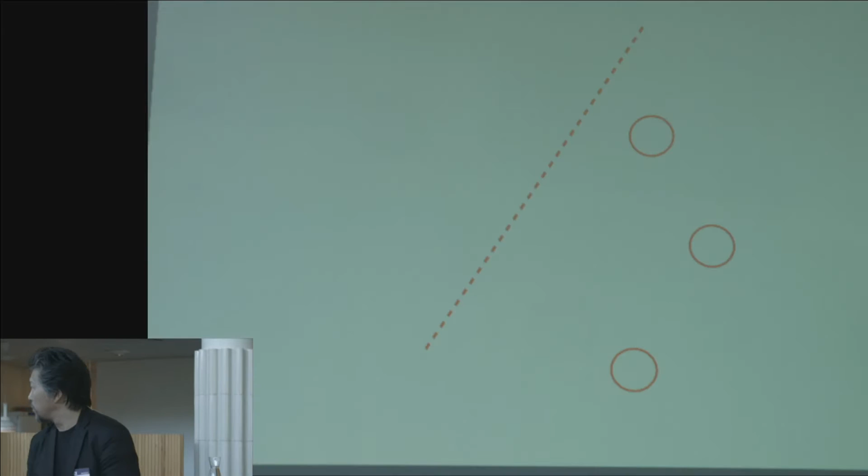What happens here? The most population is gathered in the southeast coast part of China. So we say it's a very, very big country - equivalent to what the USA has, but actually the USA has 5 times more agricultural field than China. Then we have 5 times more population than the States, which means the United States has 25 times the resources they have. So this is a situation brought by this guy, and he's saying he's 70% right, 30% wrong, and I think it's probably reversed this time.

In 1979, he set up an open policy for China, to open this window to the world, or open the door, actually. So Shenzhen suddenly became a rival city to Hong Kong, becoming a special economic zone. So the population suddenly grew 500 times during 35 years. So this is the basic situation.

You see what was there, then what is now - the PRD, we call it the Pearl River Delta area. This is getting very massive development, and the city is actually growing from the east towards the west, and it's totally developed almost - we don't have land here. You see this caused a huge wave of urbanization movement happening in China, probably the largest in human history, and Shenzhen is probably also the central point of it.

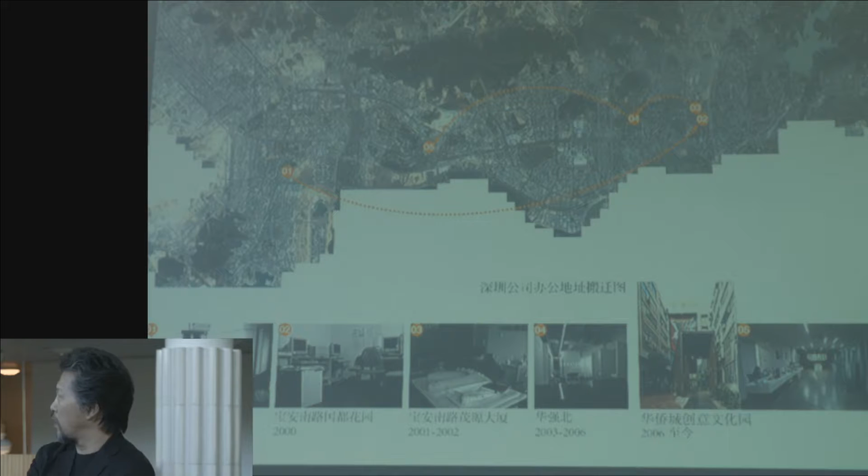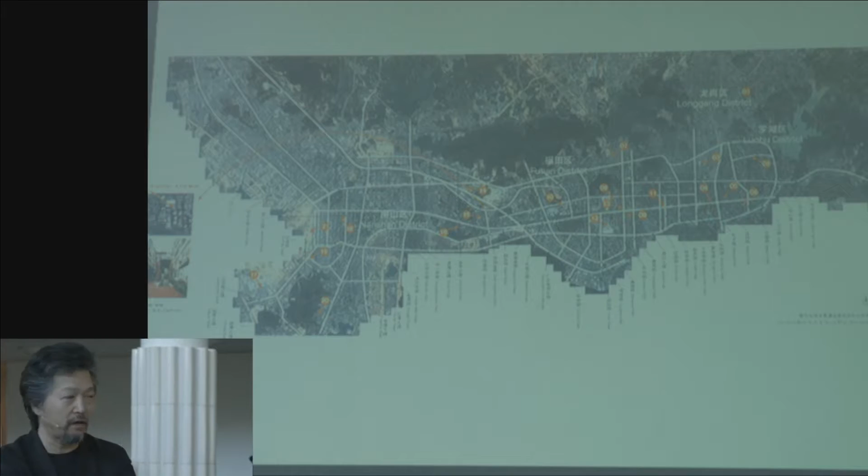And our office actually followed this kind of move from east to west, and our projects were built all over the place. We put it like 20 some, but actually we have over 100 projects built during our 16 years of practice.

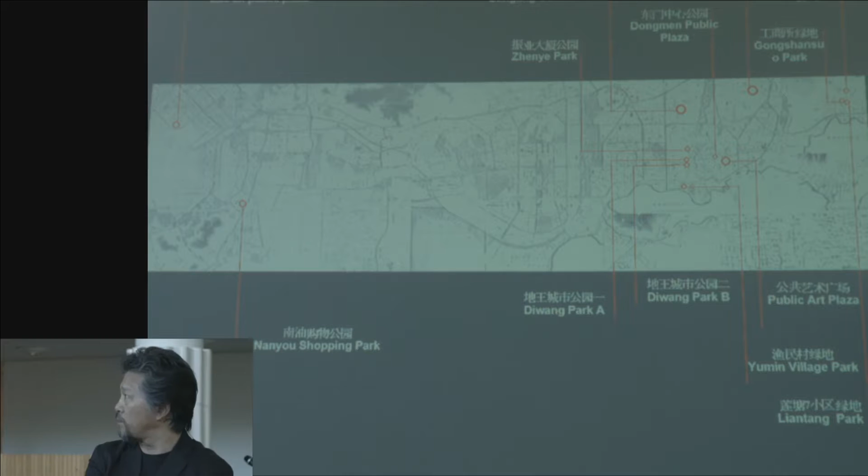We started practicing in the year 2000. Around that time, it already had 9 million people, so we were dealing with a big city problem, trying to bring in different cultures and deeper layers, adding something to the urban situation. There's really a lack of something behind it, we don't have too much, so we're trying our best to catch up. We designed and built urban public spaces in different places, and actually tried to practice what we're supposed to do next, as the city gets its main structure and is mostly already framed.

So there are several projects we've done during the last 10 to 15 years, some office buildings. As a professional architectural firm, we care about architecture, we care about buildings, lots of things. We do new buildings, we do renovations like this, we do some creative industry, creative parks like this.

Our office was the first office to move to this area, in the center of Shenzhen. It used to be a very shady light industry area, almost abandoned. Then we turned it into a very fancy cultural landmark in Shenzhen.

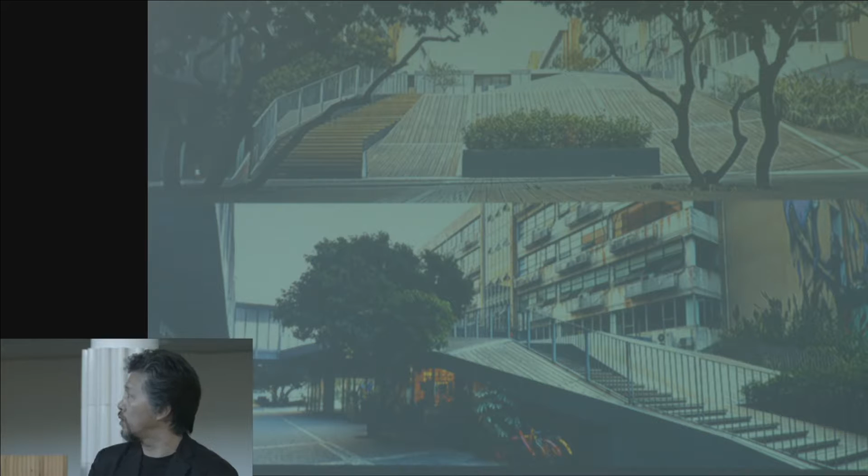We've done all the paintings, it's all our work. We organized internationally famous painters to come over and paint those things, making this very special. This is all our work in the public area.

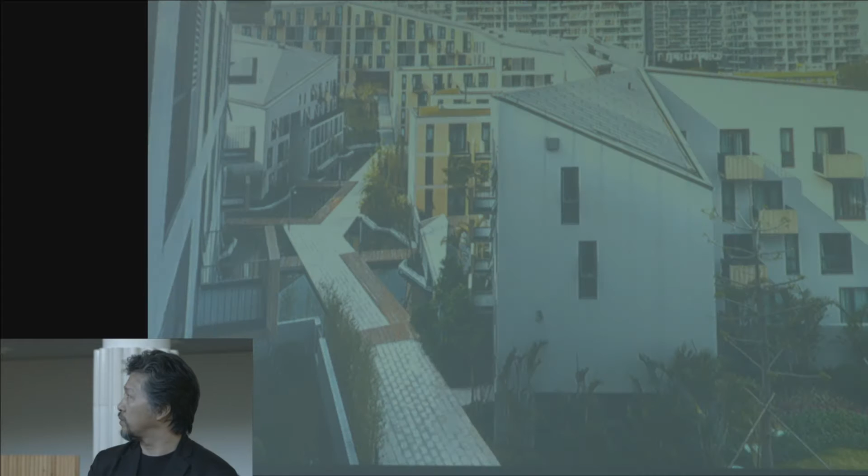We did some probably well-known projects at that time, in 2008, something was built. And we're talking about some environmental crisis — once Shenzhen got to 13 million people, and the whole China has the same problem, Shenzhen has less pollution, better than Beijing, better than Shanghai.

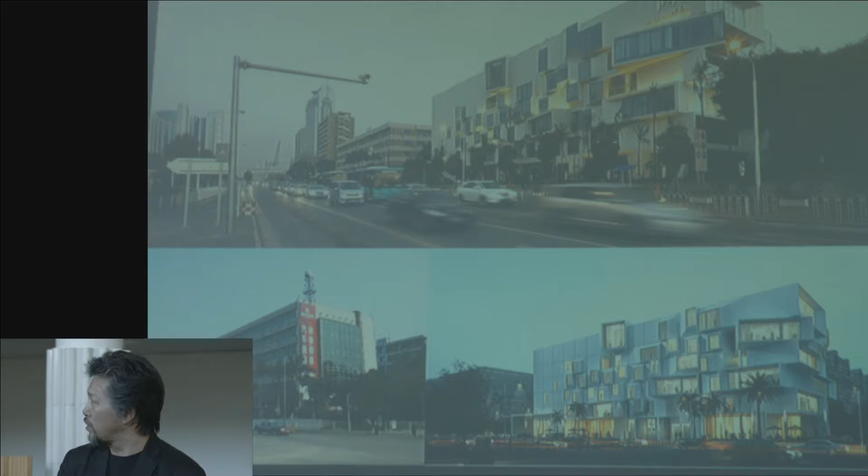We still continue doing a lot of public buildings. Even this one, which is so small, less than 1,000 square meters, we built within 2 years, and we continue doing some fancy renovation.

This is an experiment and also the proof of what we try to show people — the value of the old building. So we don't easily just tear it down; we leave some history, leave a memory for the city, even though it only has 35 years of history. The old buildings, we only have 10 years of memory.

Memory keeps getting wiped out. It's like we're just a hard drive, and sometimes we always get reset. This isn't right, so we openly criticize this kind of situation.

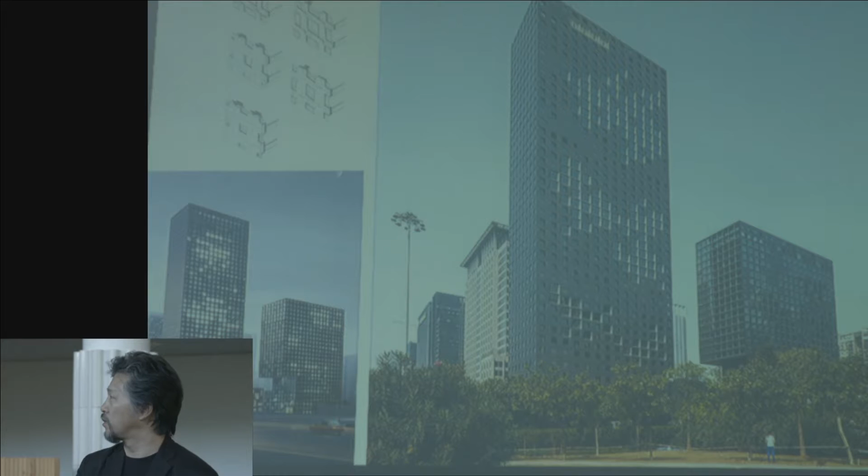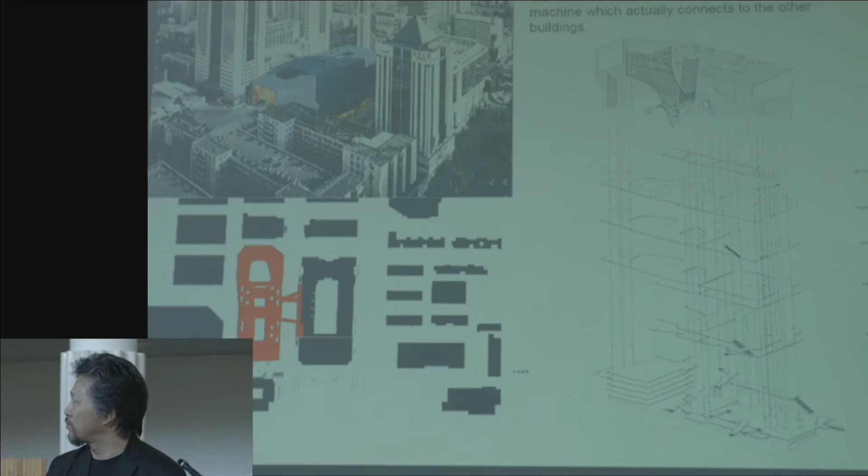We have done a lot of high-rise buildings. This one is going to stand for probably at least 50 years. Some building complexes we tend to do — this is something we really like to do, trying to use the new building to solve existing problems.

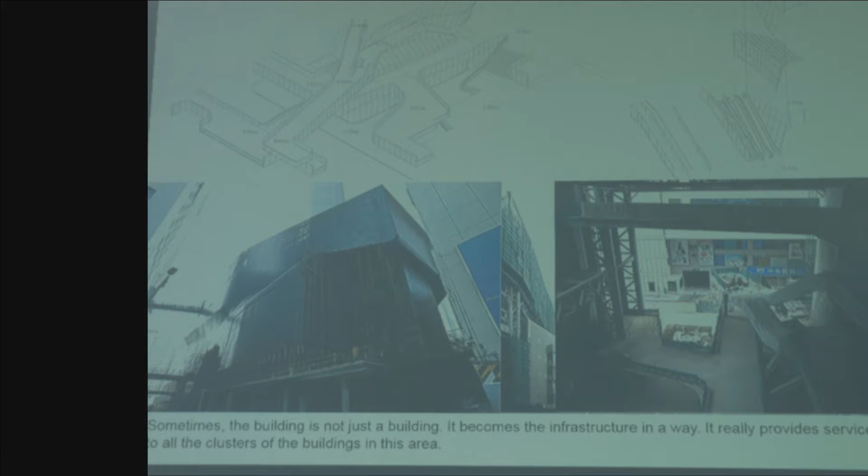Some human logistical circulation issues, and in a very congested area, we build usable space and also solve some existing problems.

I don't want to talk too much because of time, but there's a very interesting project — even though it's so simple, it actually combines a print factory, office building, and art gallery all together on one triangular site, a very congested site.

The circulation there was very hard to design, but it's already complete. Sorry, I didn't replace this photo.

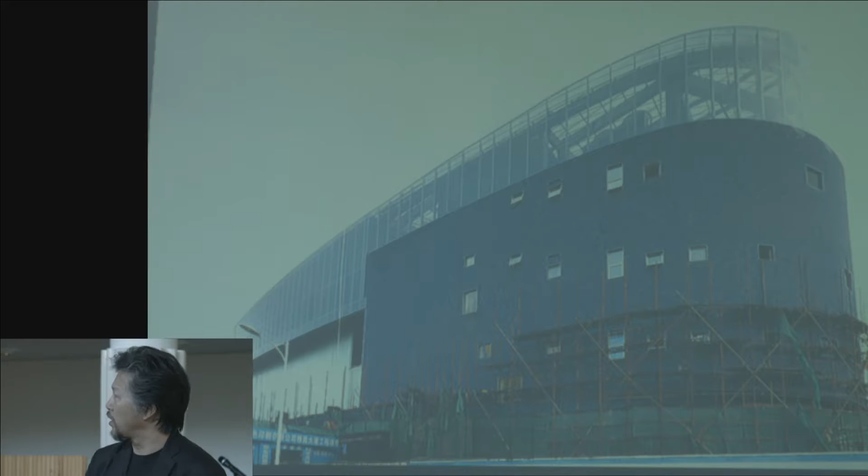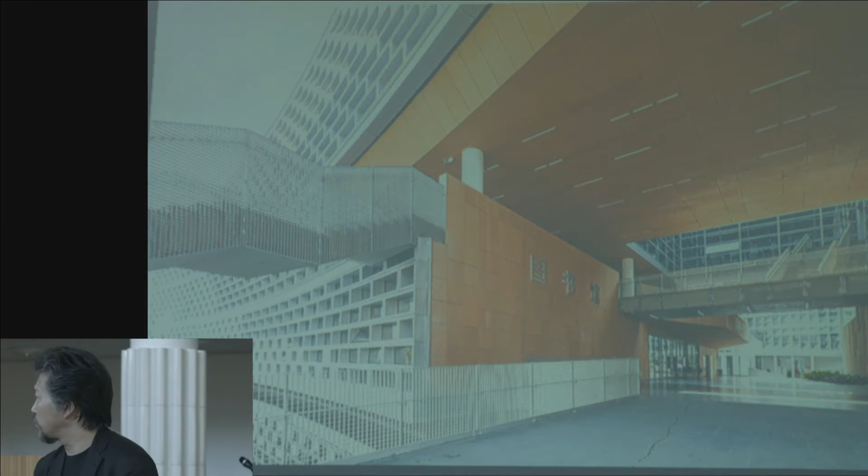This is a library, a university library, and we tried to use some new approaches. This gets to the point where the whole of Shenzhen has run out of land, so we have no choice — we have to do urban regeneration.

This has become a major issue, and you see that Shenzhen has urban villages. It just happened that it used to be a rural area, so the villages are scattered around within about a 30 minute walking distance.

This is kind of evenly distributed — some villages are large, some are small, but they're nicely distributed. It became the low-income society in Shenzhen, because when Shenzhen acquired all the farmland, the city just kept growing and surrounded these villages.

Those villages weren't part of the urban city system — they were self-controlled and self-managed in everything. The city only provided power and the sewer system, that's all. So this became a very interesting situation.

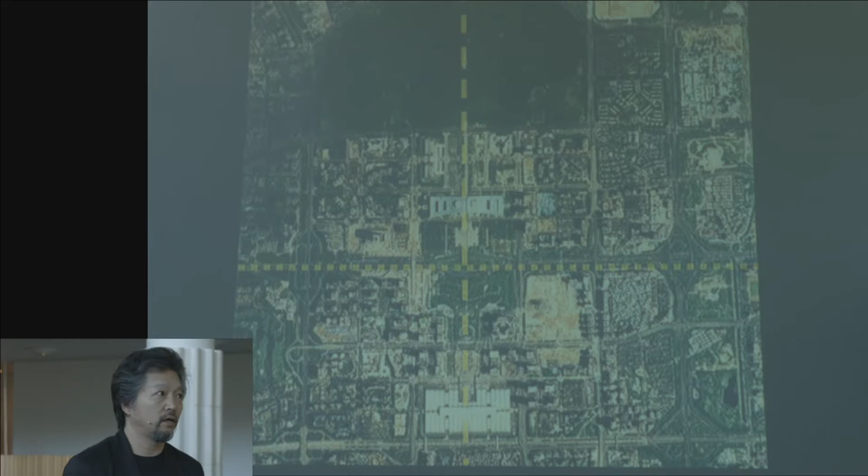When you see Shenzhen develop, like the CBD, that's just happened in the last 15 years. It grew from just empty land suddenly into a very rich district. A lot of life, both the old type of life and a new type of economic pattern, is being introduced.

This gave us another opportunity to think about what we should do. Do we really want to keep the traditional role as just a professional architectural firm, doing whatever the client wants, sitting and waiting for clients to come give us a job? We started a second line doing research. So we borrowed this idea of research-led design.

The way we thought we could do better was to study what's going to happen in the future of Shenzhen, a city like Shenzhen, maybe some other cities. Our starting point was research on urban villages and the conditions of how people are living there. We found it so interesting that most people don't really understand or know about it.

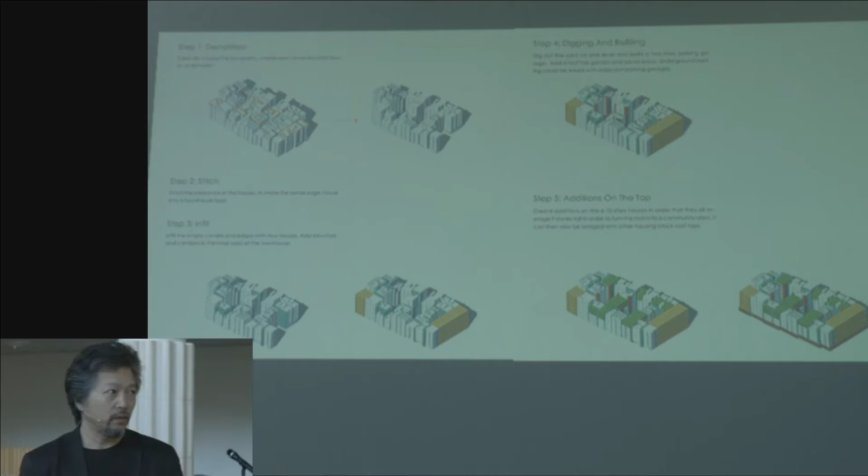This is what we have done. I don't want to over-explain it, but it's about how we can use the existing cluster—take off some of the buildings, improve the ventilation and sunlight, split those buildings into pieces, and put them on the roof.

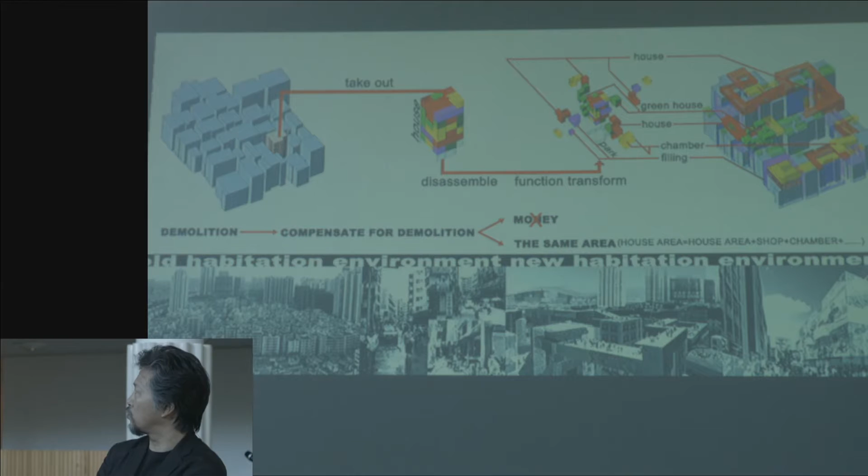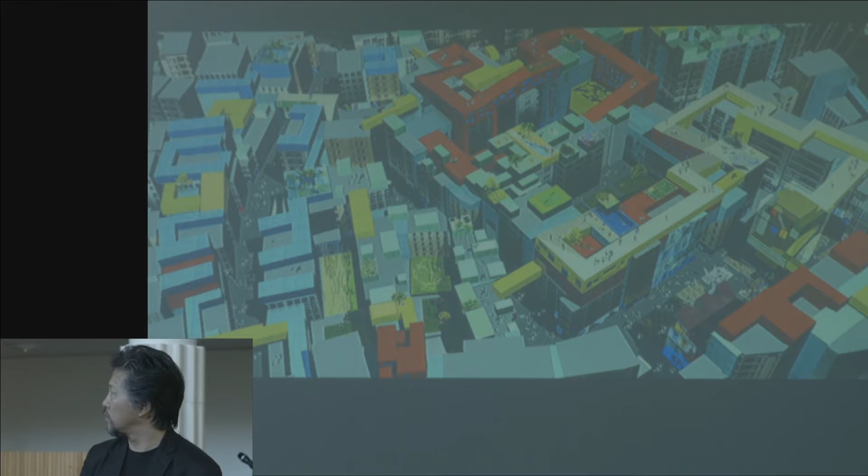In return, we solved a kind of fire escape route—a new route on the rooftop—and created a whole new level for the residents, for the tenants actually, to live their own lives, leaving the ground level as a totally commercial area. So we call this rooftop urbanism.

We drew this specifically to convince people that this is actually nice, right? Urban villages aren't that scary—we can improve them with this kind of method. It doesn't necessarily have to be like this, but that's the way we should do it.

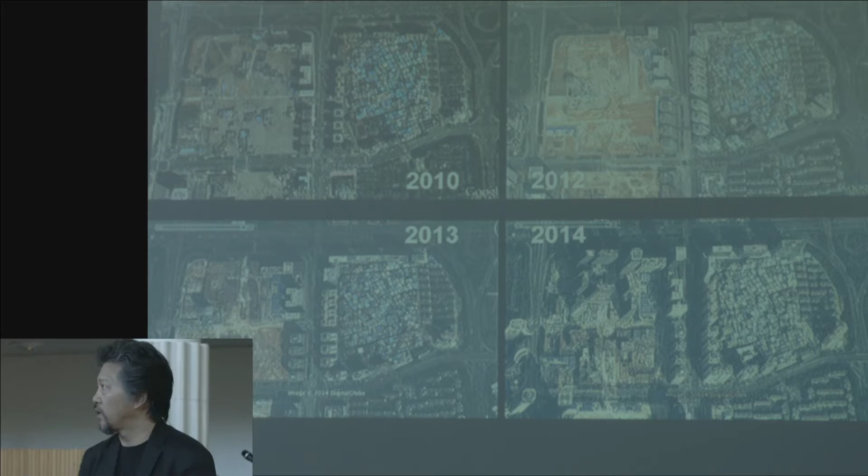We published a book, handed it to the city, handed it to the media. We worked with people who had similar ideas, and we pushed this. I think it had a little bit of an effect—the city actually started to identify which areas could remain and which could be demolished. So this is what happened.

Actually, what happens is also the fate—but people cannot control their fate, right? So when the left side is demolished, the area is already evacuated. But it used to be so crowded, so rich, and the people had their life there. Even though it's a kind of low-level life, they were still living happily.

Well, I see everybody—most people are kind of happy. So we cannot just chase them outside of the city to the suburbs. They would spend a couple hours commuting into the city, creating a huge traffic problem and increasing the cost of the whole city. So this is not going to happen.

We already say you cannot just demolish those urban villages to replace them with ugly residential towers. You can see it everywhere in China, not just in Shenzhen.

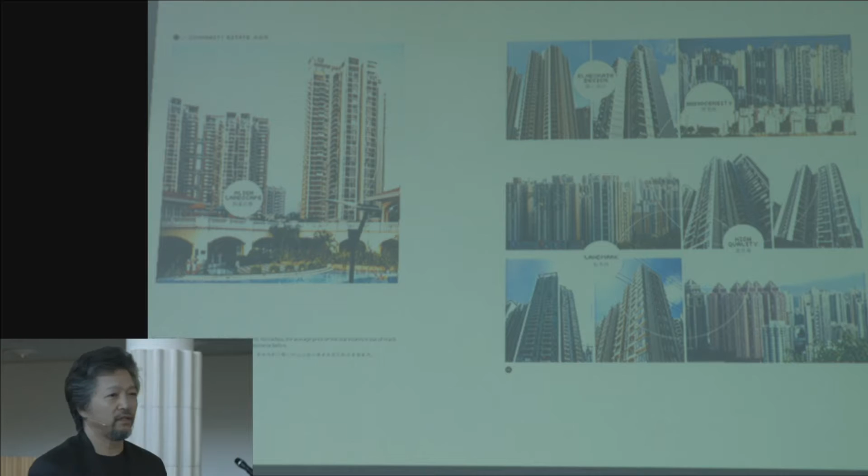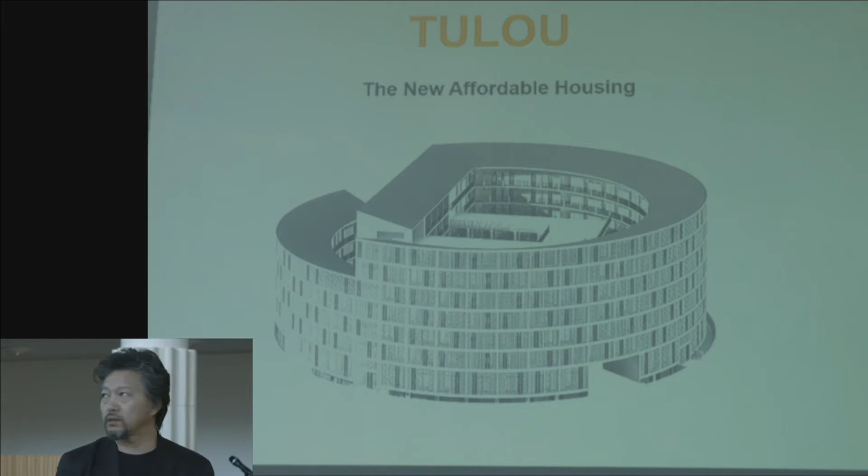This is the experience we did with a developer who wanted to do a social housing experiment. We created this new affordable housing program inspired by the traditional Tulou—a vernacular architecture that appeared in the last 500 years in the southeast part of China. In the mountains, there are still thousands of them remaining right now.

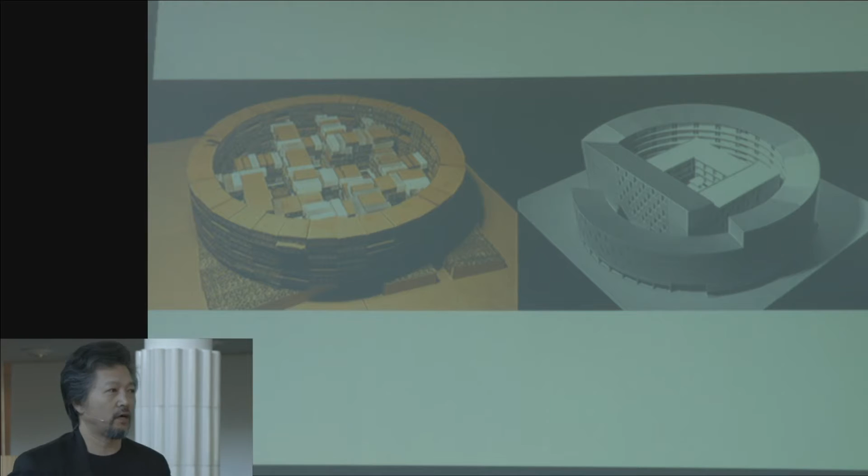And some of them have become like this—probably one of the best UNESCO World Heritage sites. Our first idea was to combine the urban village idea with this Tulou formation, and put them together to make a very big, very large affordable housing community.

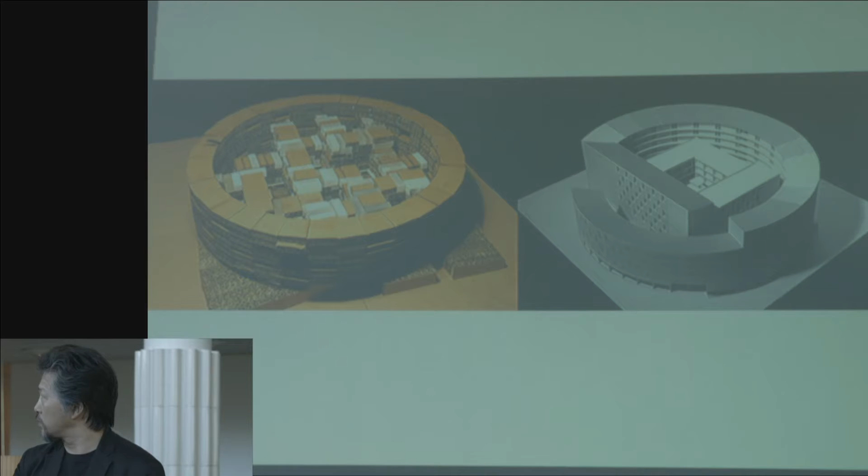Later we selected the right site—a smaller building—and we tried to use it as a prototype that we could copy, colonizing it to the whole city.

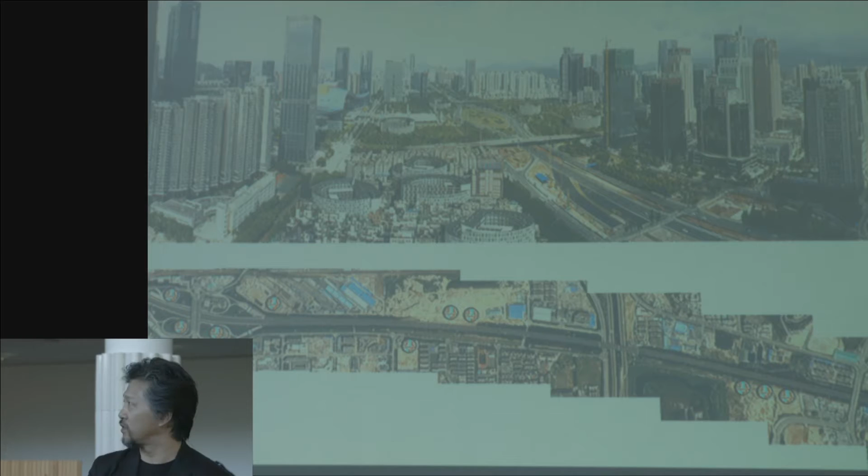And it actually worked out quite nicely, with a very, very high occupation rate. So this looks like this—very much like a traditional Tulou, but to tell the truth, this is 100% contemporary modern architecture that we did, using the concrete method.

Everything is concrete and a little bit of wood screen, and it has 5 courtyards. The fire engine can get into this kind of outside. It's a circled, curved courtyard, and the center courtyard is quite nice.

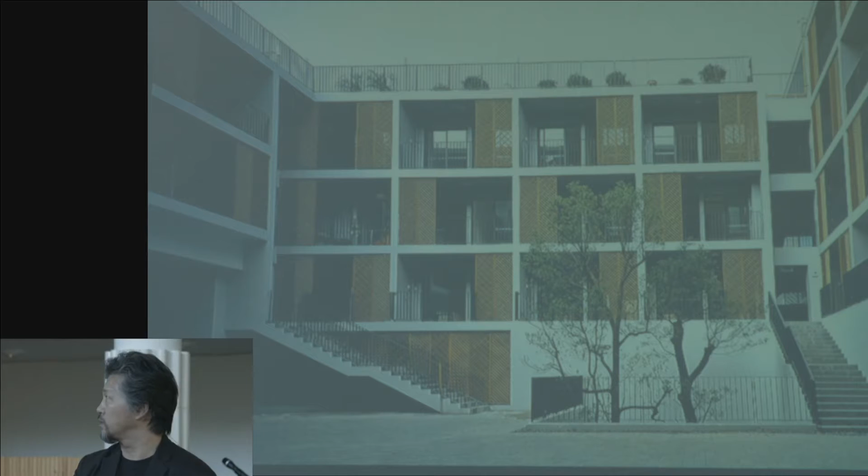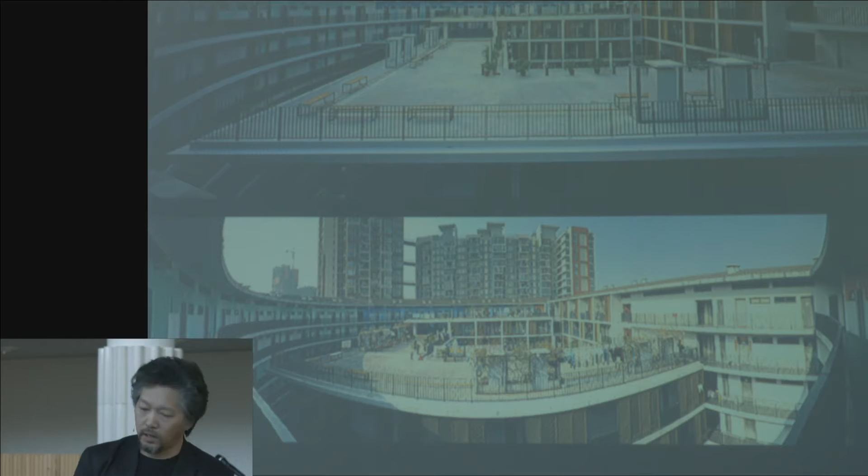They feel safe. So we did a lot of post-occupancy research, surveys, and tried to find out what's going on, what we did right, what we did wrong. So this is the start of our research.

The point is that this is the museum we designed in an urban village. It's a bizarre situation, but we decided to participate in a competition, and we won. It's a very unique phenomenon.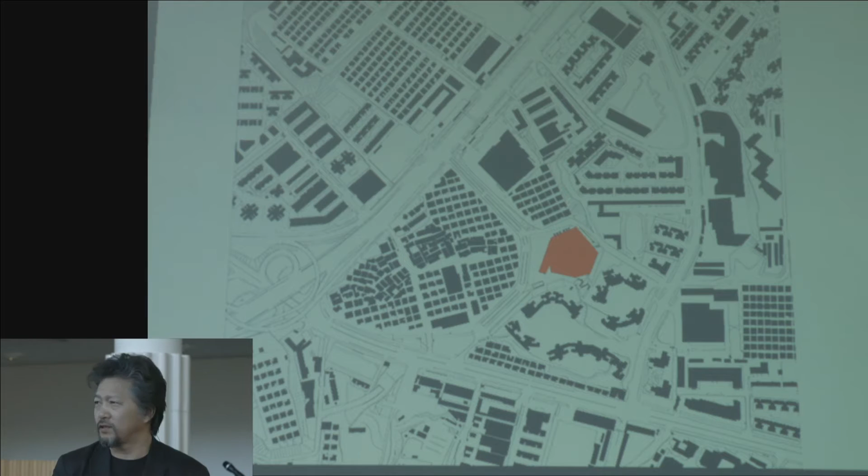This village actually turned itself into a massive handmade oil painting industry. So they upgraded itself from a very normal urban village into something kind of upgraded, kind of a cultural industry thing, but it's also bizarre.

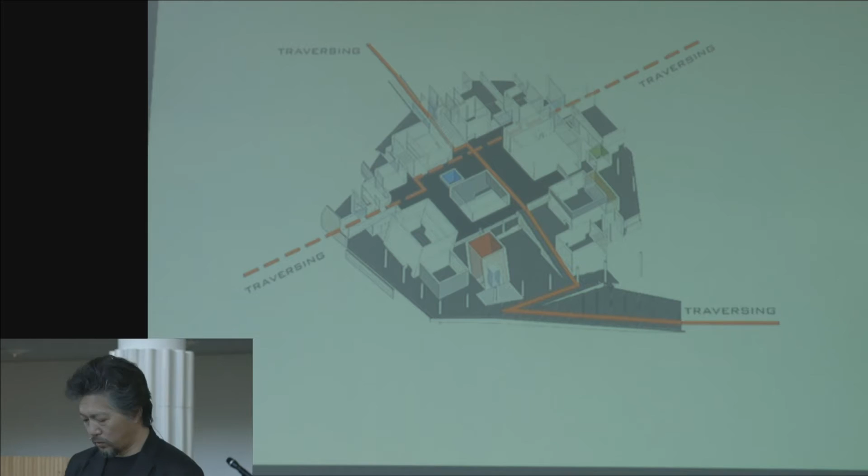And what we did is not just make it something like a museum, we actually dealt with this as a community center, so people can actually access it 24 hours.

The top boxes actually have a dialogue with the opposite urban village, so you don't see this gigantic mass actually destroying the whole urban fabric.

And they left a large square to give the opportunity for large events, and people are happy here to do whatever they want on the inside. So you see the top level is for artist studios, and it's also very easy to access the nearby neighborhoods. So this is what happens.

This is going to be. So this is something. How much time do I have? Don't worry. Sorry. This is the project we have done, and we started to think, okay.

Urban village kind of an idea, it's actually solving some affordable housing problems a little bit. And what happens, we use these high density ideas to apply to a commercial building.

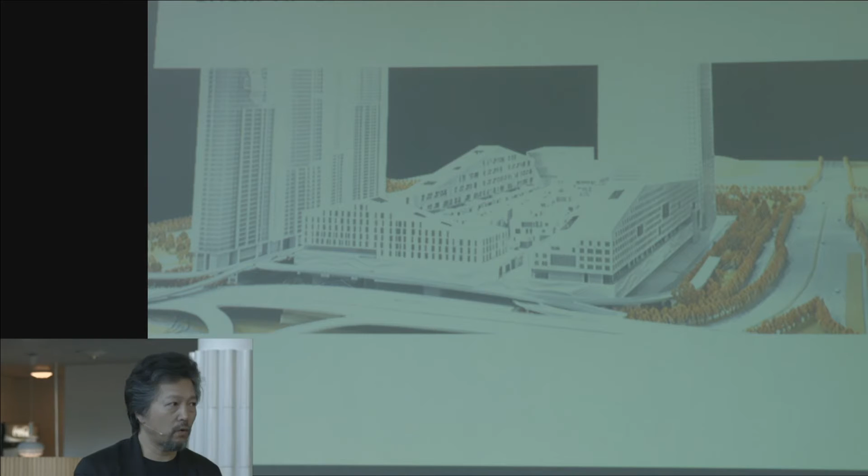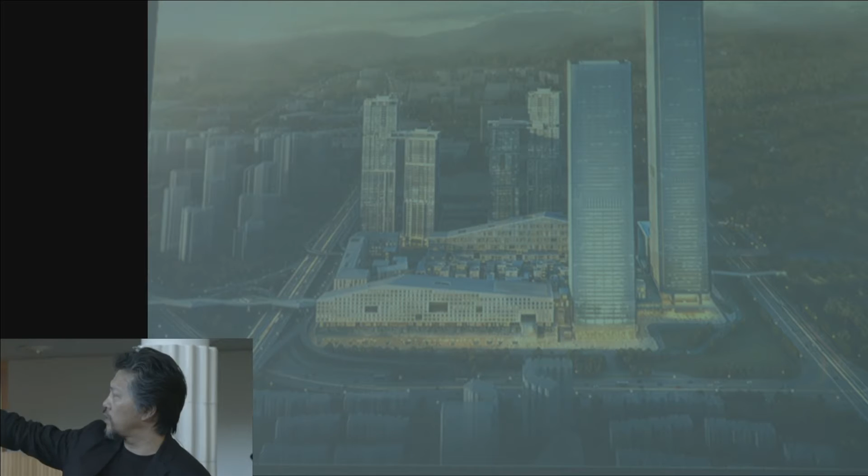So this is a project we did for another big developer in Shenzhen, and this is a very big development. You see the two super high-rise towers and one huge shopping mall underneath. This is very standard, like exactly what an American shopping mall looks like. The form is the same, with a high-rise residential building behind it.

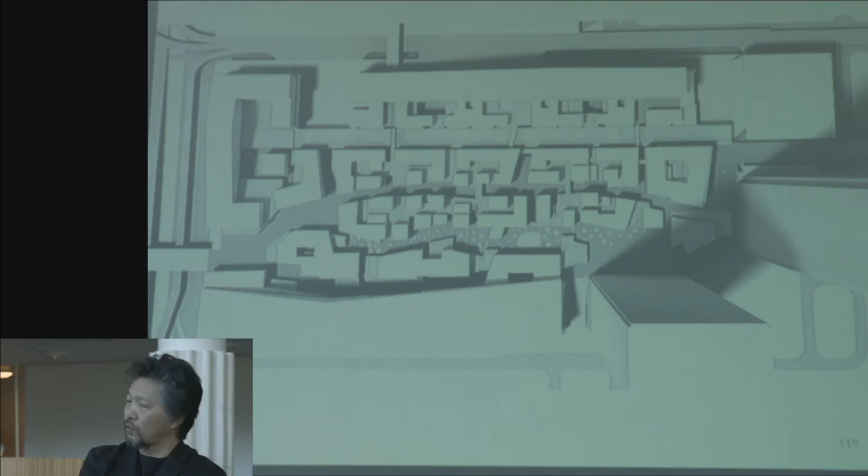It's a very nice site connecting two hill parks, so you can stand on one hill to overlook the other. So the site is just there, and we thought it was a great opportunity to bridge the two parks together.

So we made a small town-like environment, something in between office and residential. We call this Soho.

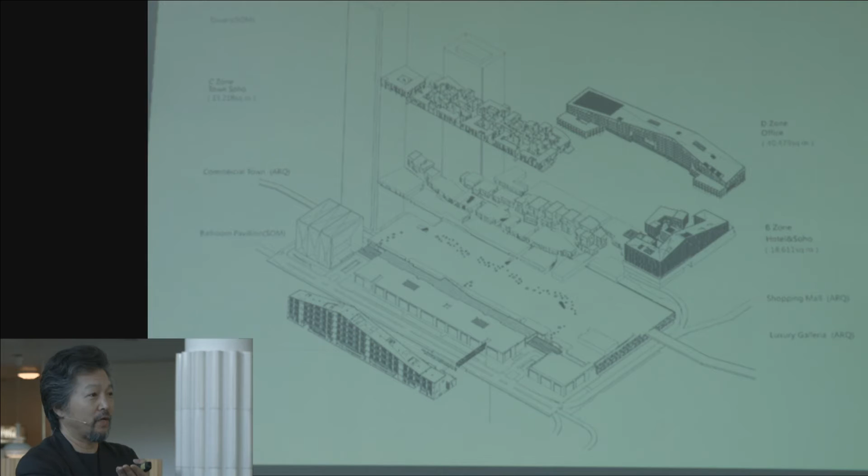And this is the only case, I think, that can only happen in China, because here in America, it's not worth building something on top of a shopping mall. Structurally, it's very difficult and very challenging.

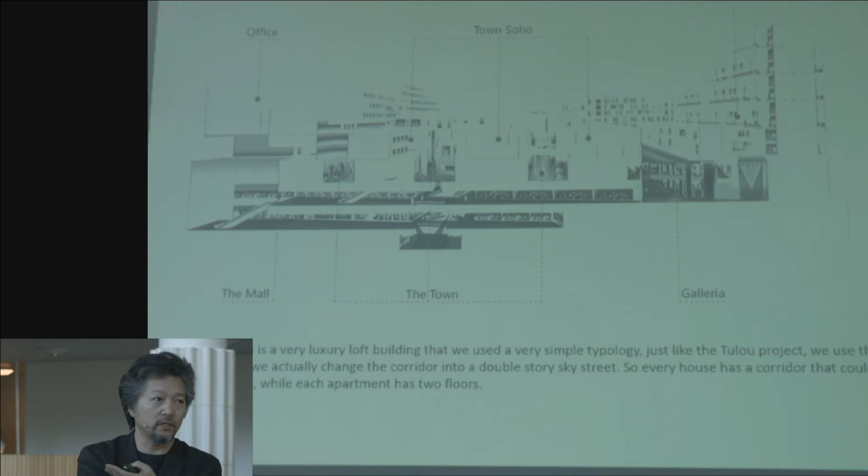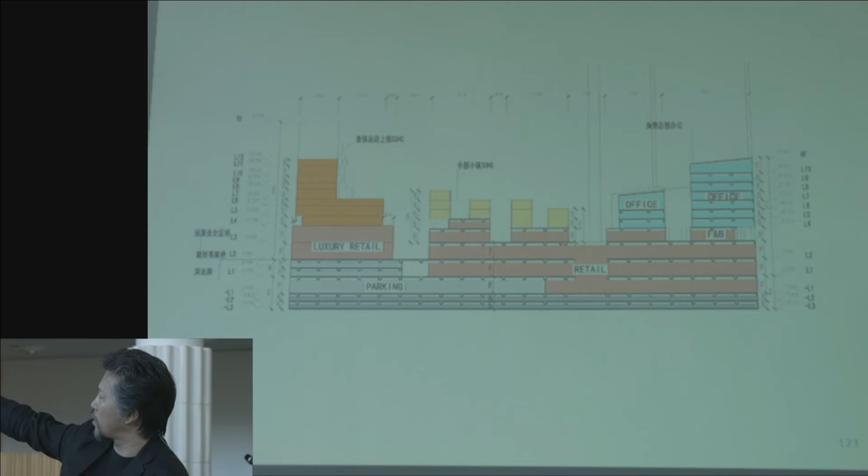So this is everything we designed, not the shopping mall, which was designed by an American firm, and so we drew this to show them what is going to happen. The yellow part is the loft, the green part is the office, and the orange part is the luxury loft apartment.

So that's the way we do it, and the fire engine can come up to the top floor. Finally, it actually works out.

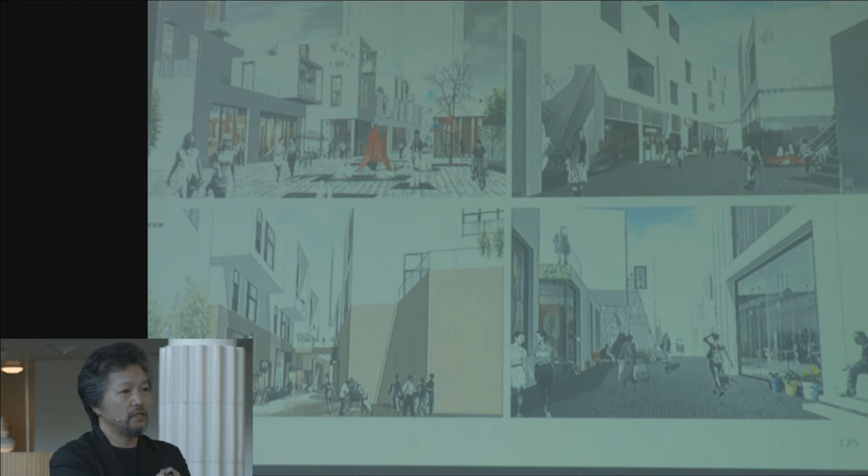Even with this very commercial type of project, we actually tried to make it solve a certain kind of problem, like what if the city needs more land and more area to be built? That requires some special strategy. So this is the strategy we provide for people.

And obviously the city is happy, and the developers are happy, and it's become a really good case for developers. They suddenly realize that a 100,000 square meter shopping mall site can be built like this.

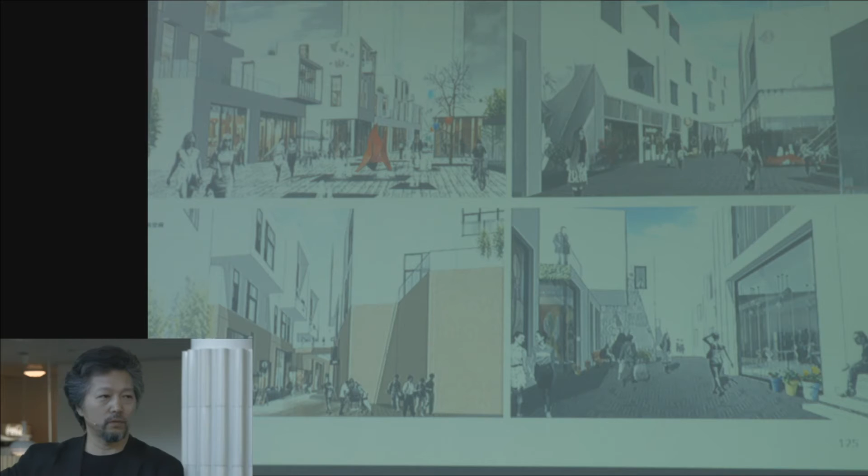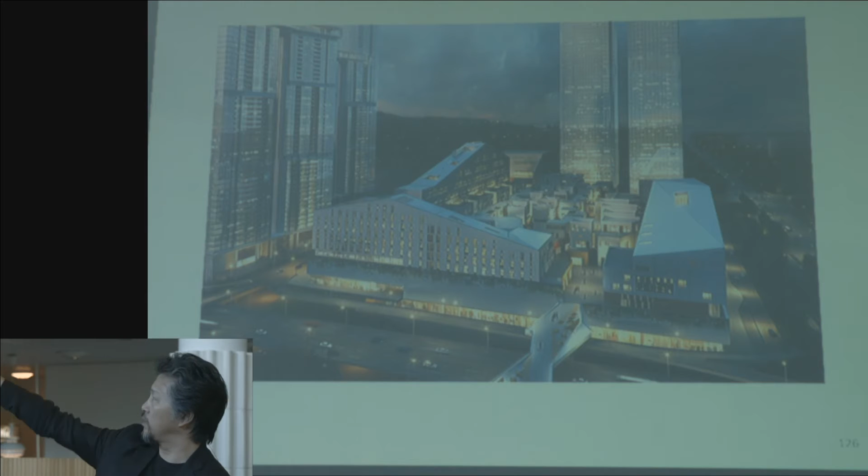So now there's a top, very nice living place, rather than the left side being just a high-rise building. So we gave them an alternative way, and gave people an alternative way to live.

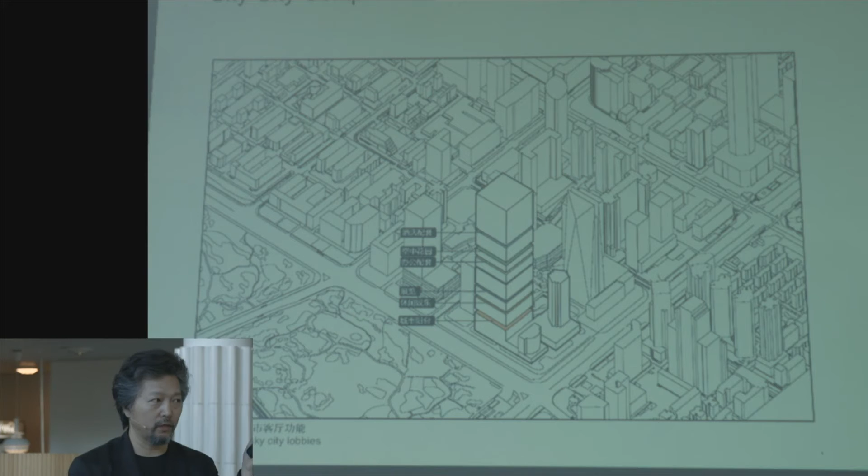And this is the city we like, it's an upgraded urban village. So this is something, everything connected. We constantly use this kind of idea, our research, and every time we get a project, we think about what we can do. We do research, we know what people really wanted.

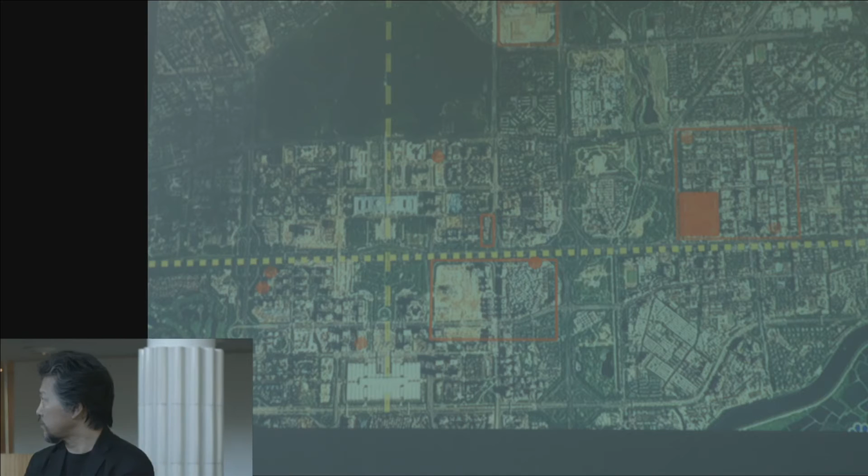So this is some more extreme case where we were trying to make the thing work, in the same area in the CBD area. So on the right side is the big site, they have already built a shopping mall there.

They want to say, okay, we want to build more, and what's going to happen? So they come to us and say, I know you're doing the high-rise, high-density studies, can you do some study for us and give us some idea what can happen, how high the FAR can go.

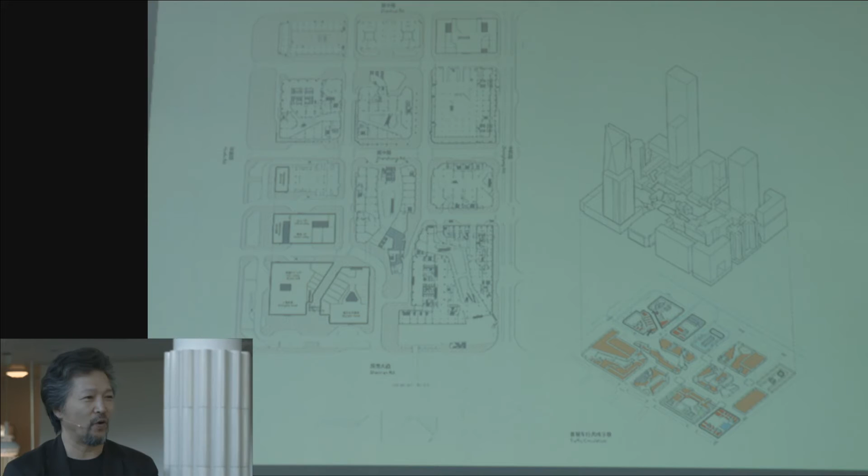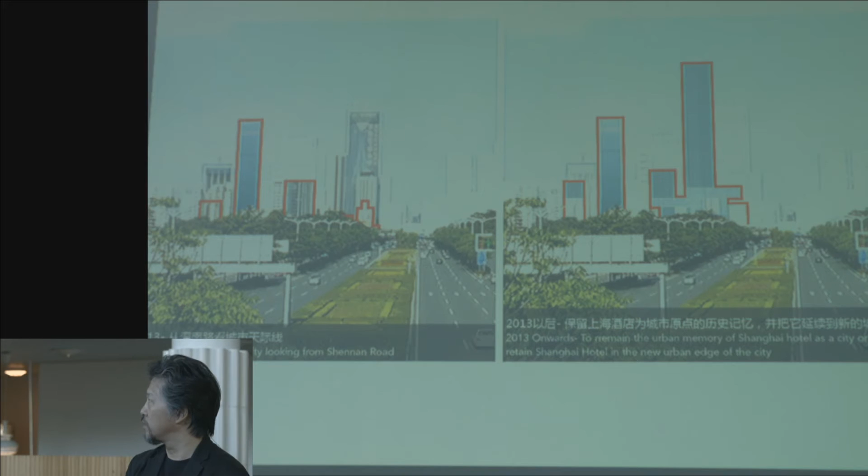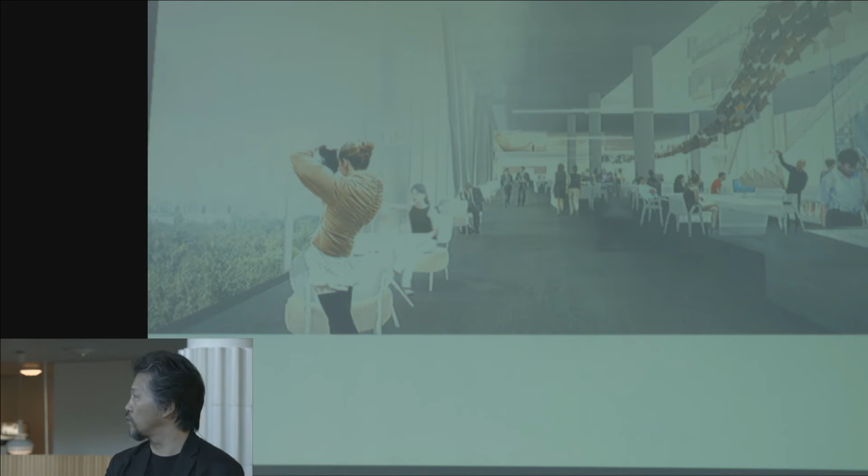So we gave them 3 strategies. One is very conventional, facing a Central Park-like green space. This used to be the start point of Shenzhen, at the edge of the city. We blow it up into like 10 times - there's a historical landmark here, only about 7 stories high. Now we extrude it into maybe 400 or 500 meters tall and make it a multi-level, multi-function, high-rise building, introducing a nice life to people.

And when you see the section, it's a very rich kind of volume with lots of voids and lots of activities. That's what gave them the chance to solve the problem.

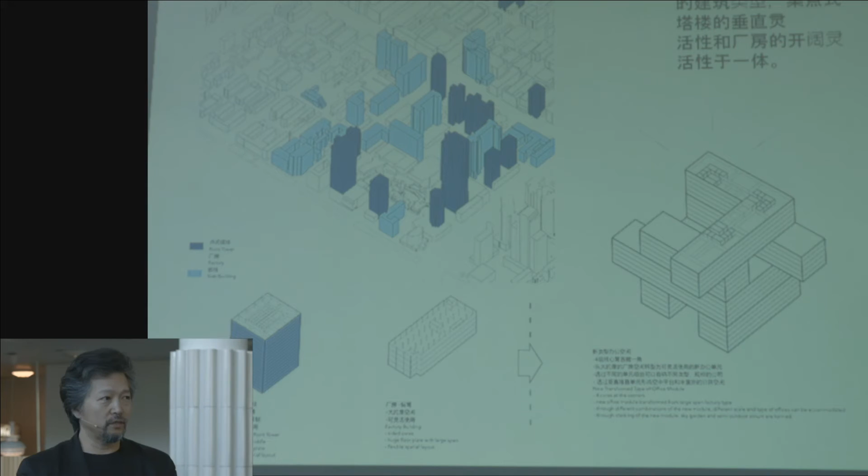Then we gave them another option - stacking all the small buildings together. That's not a new idea, but we told them this is also an idea. We can take this kind of 5-story light industry building adjacent to this and stack them together, simply stack them together to make a high-rise. And they become super flexible blocks, so they can adopt new developments.

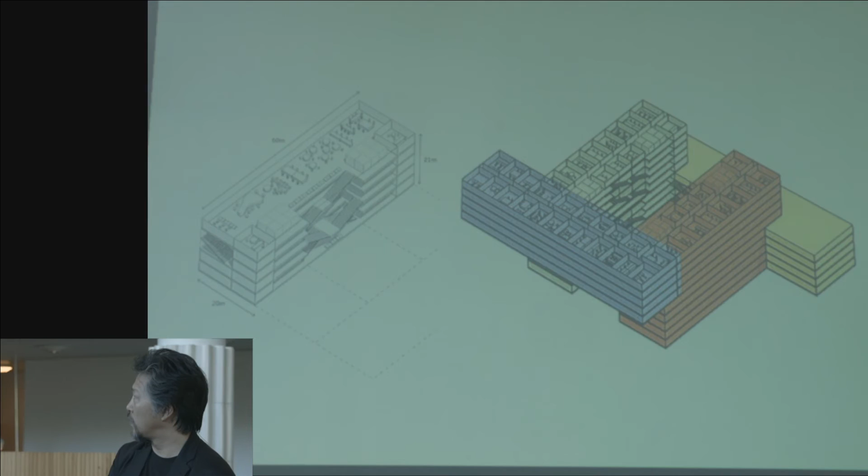For example, this area is full of IT companies and small companies. They're changing every 2 or 3 years, and we can make it large or small - it becomes super flexible blocks. People can live there, we can give them apartments nearby.

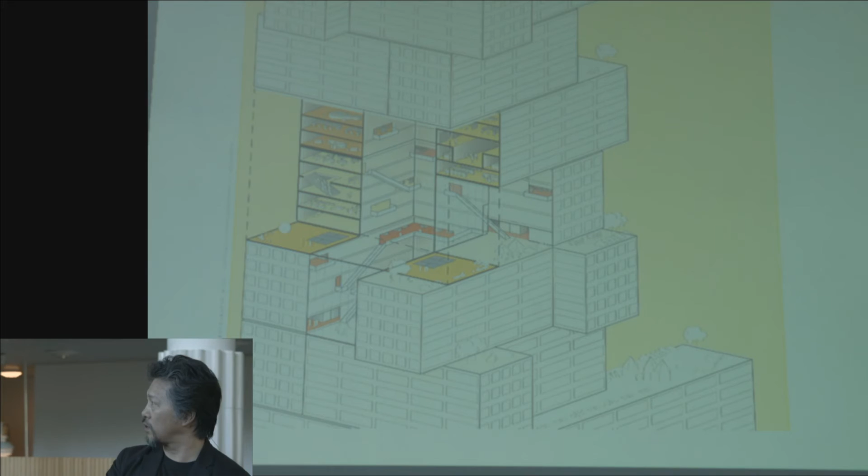And the office down below. So these are some proposals, not necessarily meant to be real. We just gave them an idea of what's probably going to happen - only the tower here is fake, all others are real.

We kind of superimpose a picture of this site. What do we want to tell them? Maybe we can make some kind of a big atrium, a sky atrium type of space.

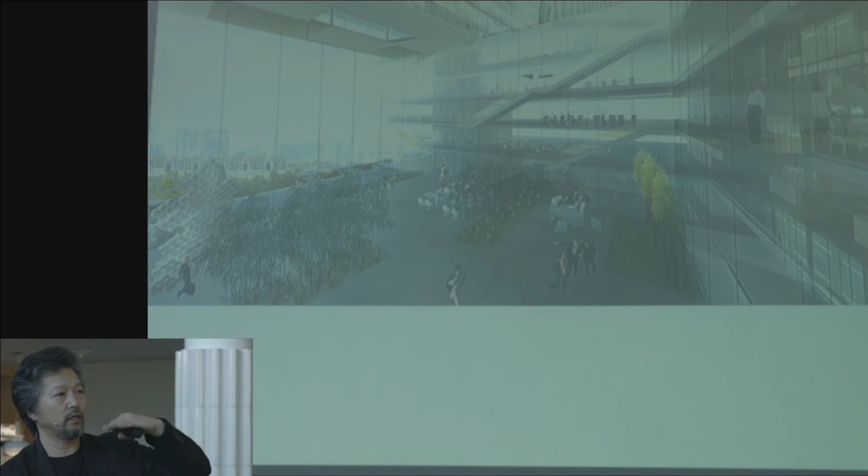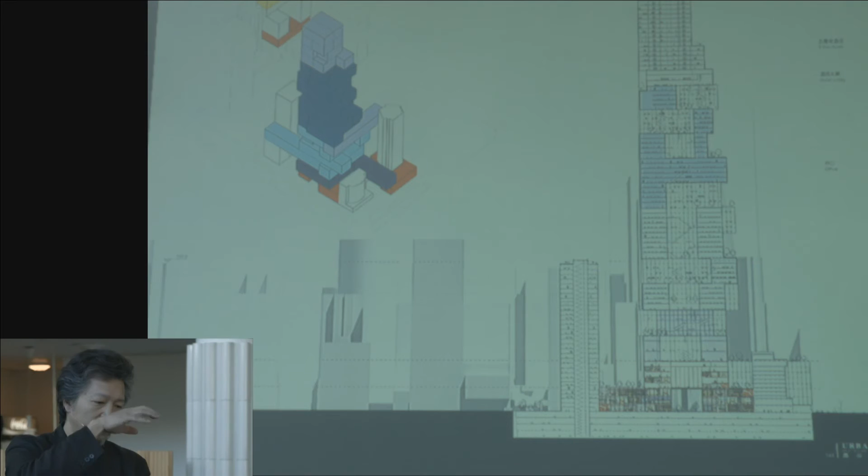This allows people to live in different layers. They don't need to always go down to the ground to do other things. So they can do multiple - it's a very multi-used block, and we put them together one by one, all different voids. It's very much like different buildings stacked up for meaning.

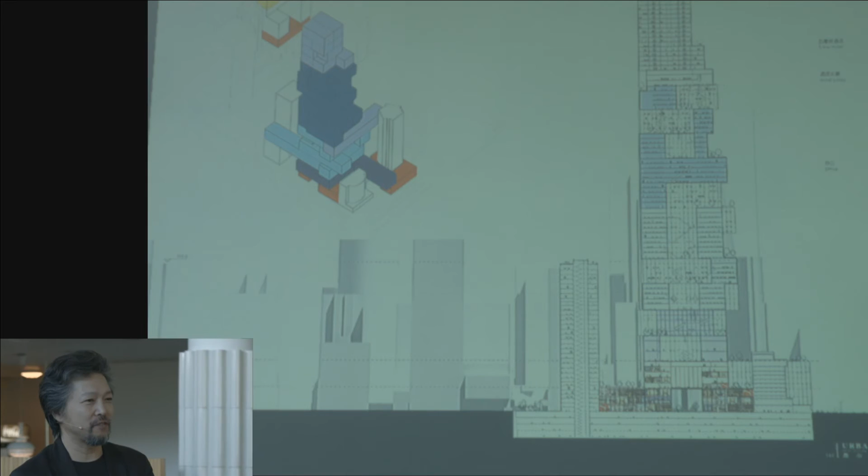Of course, if someone asks how you can solve this escalator problem or vertical circulation, I'll say I haven't designed it, but if you commission me, I will definitely figure it out. This is not a big problem because we already have super high speed elevators developed. It's just a matter of money.

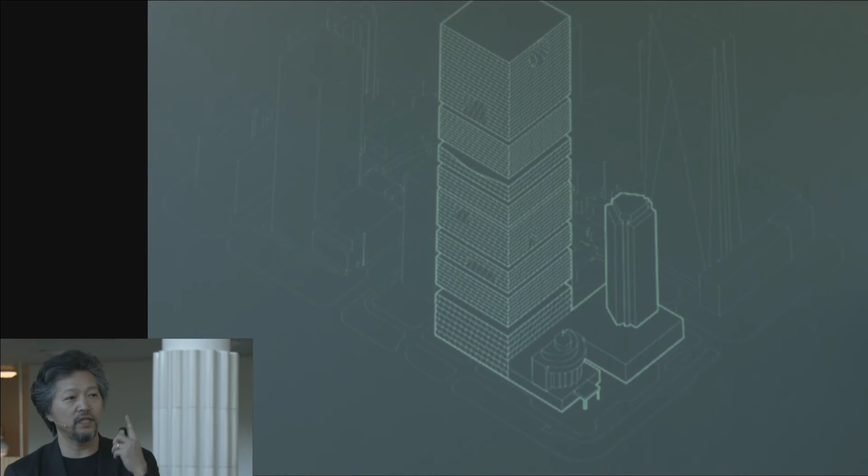But the land is more precious than anything - the building material, everything. So this is going to happen. It will happen - we already pictured this. This is probably the first city that can do this: a super block, which Western architectural pioneers have already imagined for many years.

This is another extreme suggestion we gave them - we cut the buildings into sections, where each section is actually a different building. We also stack them, very much like 4 regular high-rise buildings bound together to make one super big super block.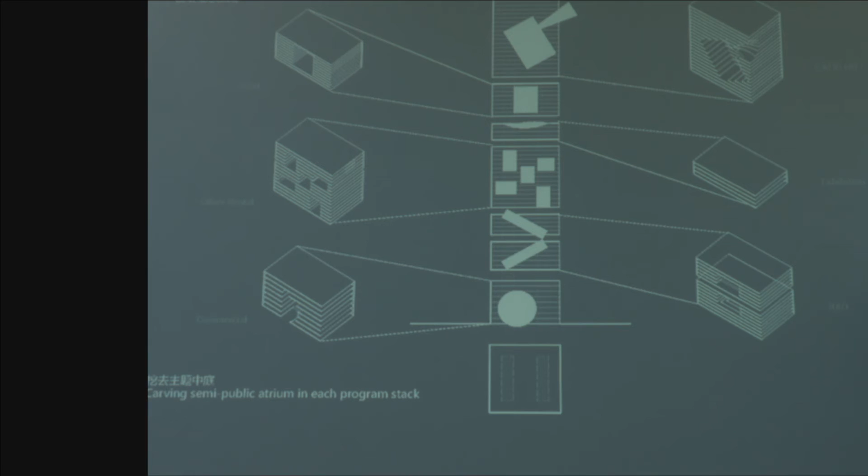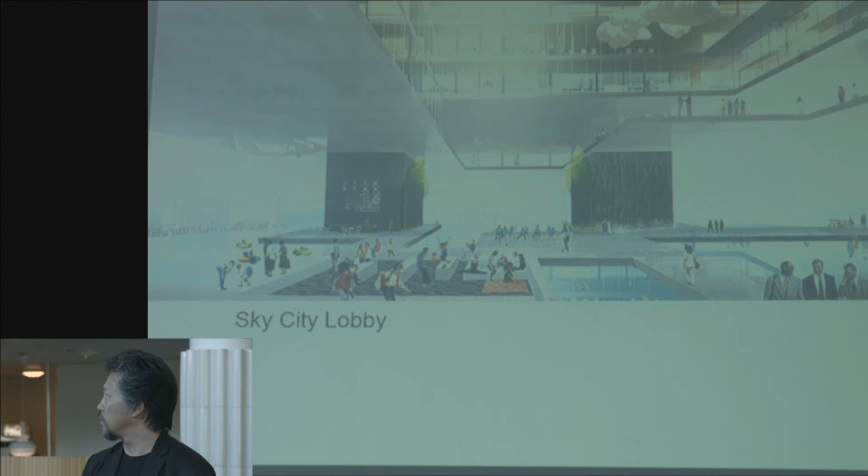The white part is the void, the atrium space in different places. Different places can have different functions in the voids, and people can live in different places. They don't need to go down.

I think this is the choice of no choice. For example, if I live here, I'd rather do a 1-story building, maximum 2. If I have a car, I'd build something in the woods - that's the nice life I wanted. But in a city like this, there's no way. You have to be a billionaire to build a house like that.

So for ordinary people, okay, let's go here, let's leave it in a place like that. By the way, we'll try our best to improve our living conditions. So that's the conclusion we actually reached.

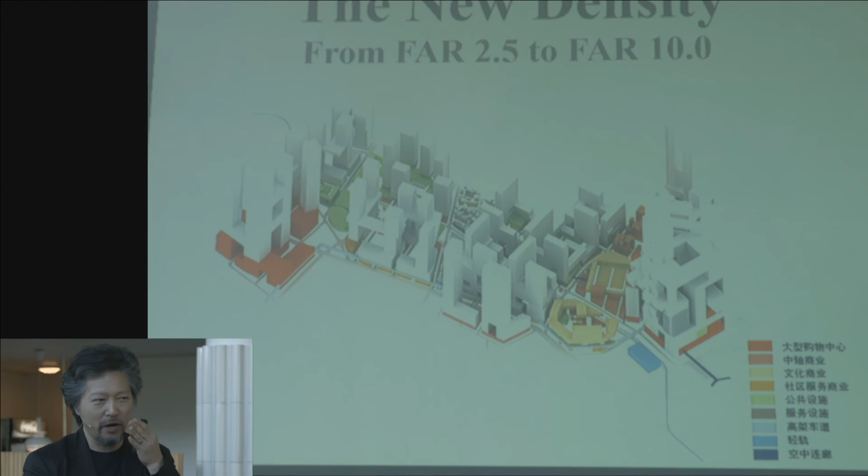I don't know if we are very narrow-minded - once we went down a road, it kept going with no end, pushing the limit. So we call this the new density. What does the new density mean?

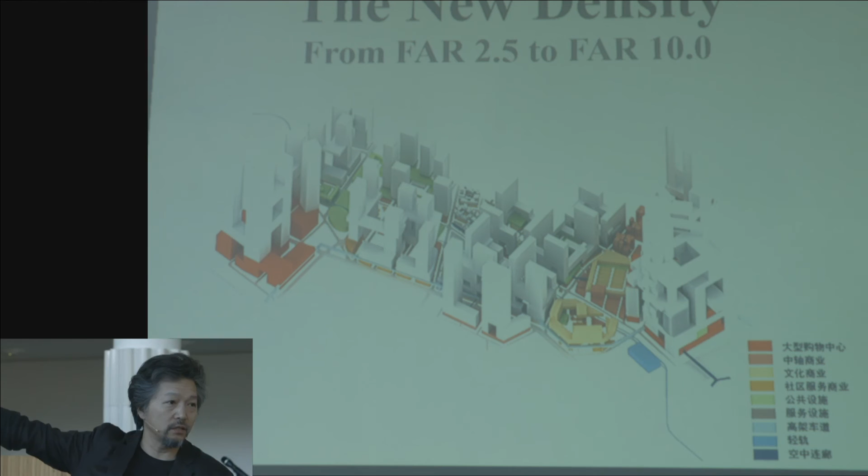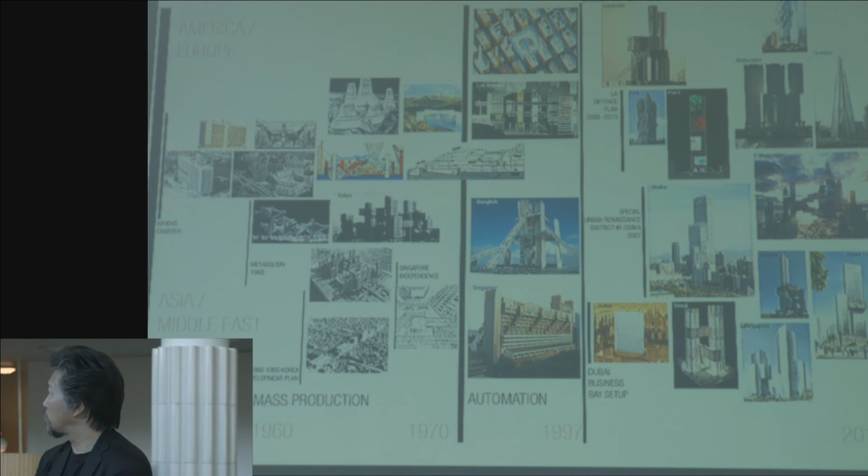This is something we did research on. I asked my guys to collect old ideas of what's called mega structures, what the old ideas were, and what's going on in different times. This is some research - I don't want to do too much - and we found that actually the newly proposed big complexes are not really meant to solve that kind of high density problem. They're actually meant to make a big landmark. This is so different from the 1960s realm. That idea doesn't really affect it, but they have some kind of link.

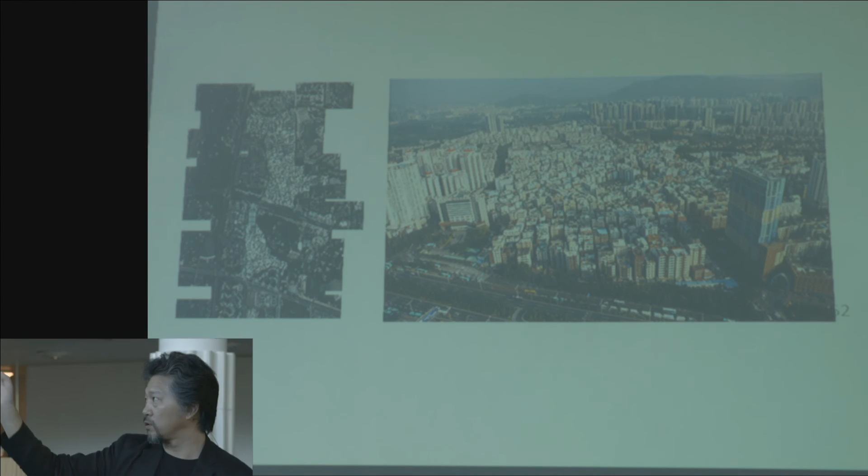And this is the reality. So you see this urban village, very big, and it's just nearby my office, like 1 kilometer away. It's facing a situation where one big developer wants to purchase this and build something big. There's one very famous American design firm that gave a master plan to wipe out everything and build super high-rise residential and office buildings. There are some very nice urban village sectors, but they just don't care - they just wipe them out. They see them as worthless, wanting to do something completely new.

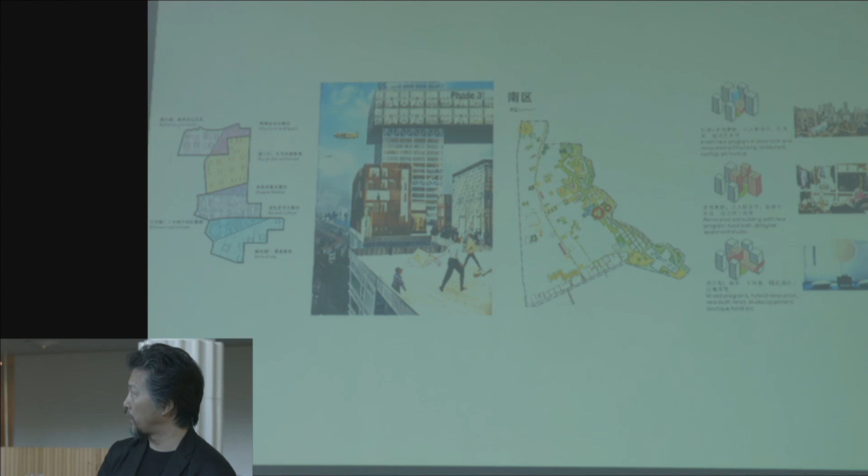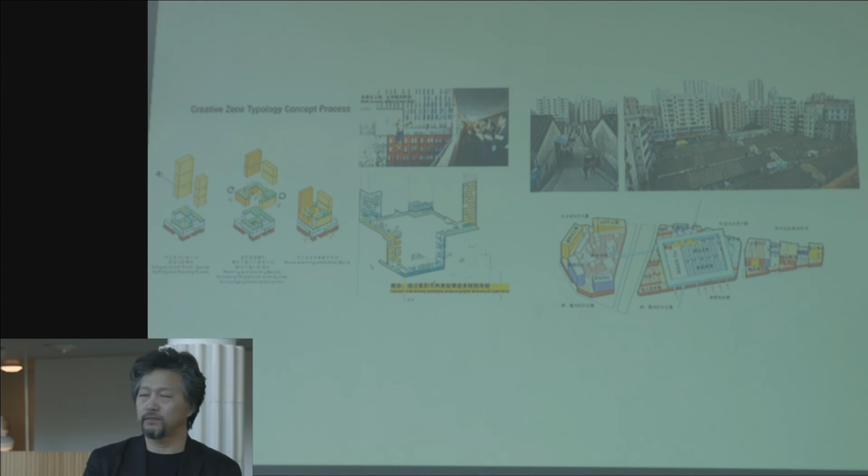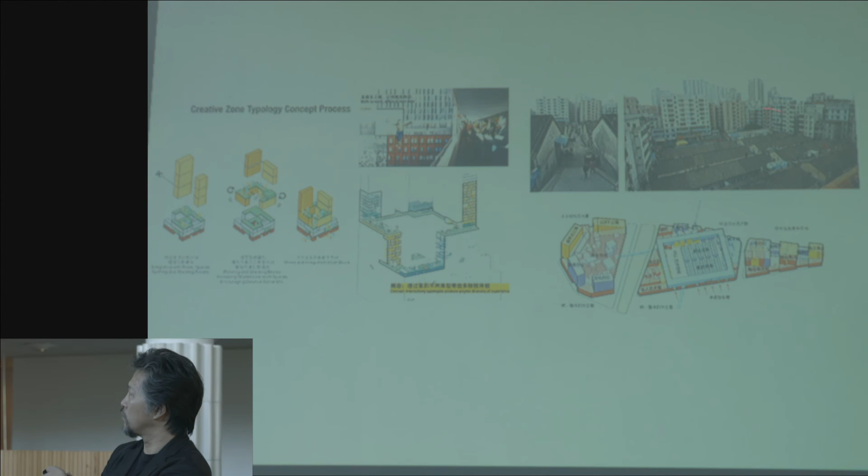So we came with our proposal. We thought they were doing it wrong, so we cut the whole village into 5 sections, trying to make each edge of the section preserve some urban village sectors. We carefully identified which parts were worth preserving, then added more density on top, leaving those very unique, very interesting urban sectors. It wasn't built 100 years ago, probably 70 years ago, but it's still very different from all others - like a compound, you see this compound. It's just very interesting, and you can see from the map it's different.

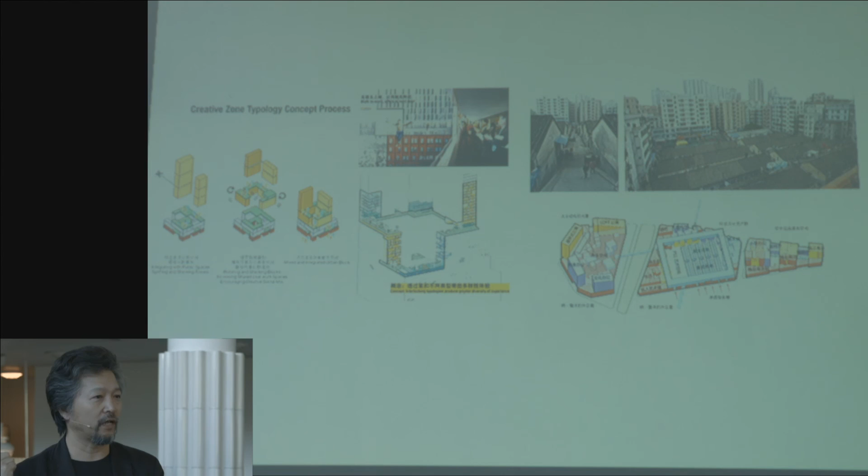So we gave them the proposal, and we even talked to the planning bureau, saying, okay, this is the urban village we really want to keep. If you give them a policy saying those reserved areas can count as green space - since they have urban planning policy with a certain ratio of green space required - then if they reserve that, it counts as green space. So we negotiated with people, but we still gave them some spectacular deal, saying, okay, this is going to happen, this is going to be good.

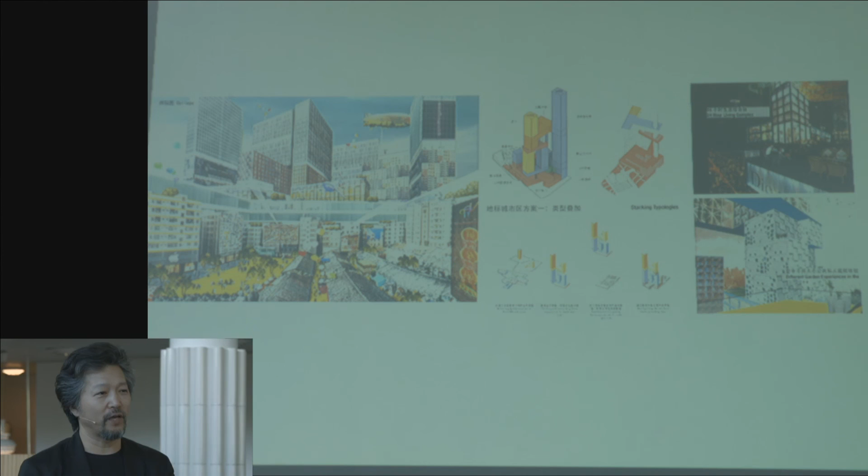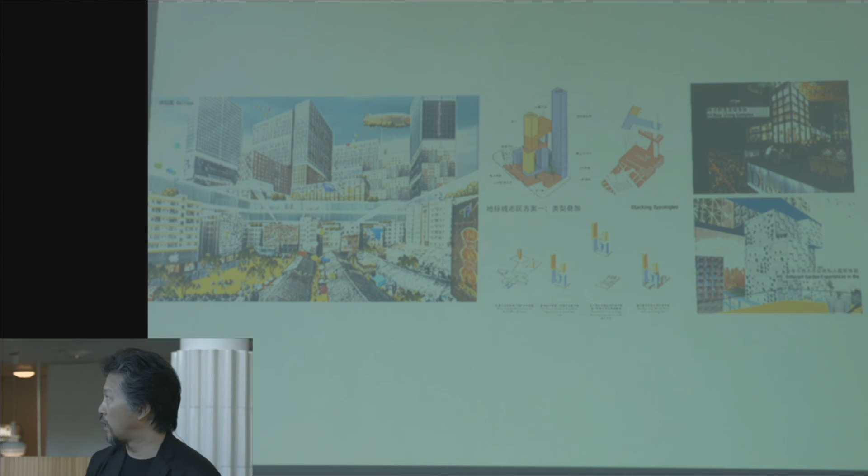It's not true, it's not a real project. We gave them a proposal, but we didn't solve any detailed problems. This is something we're pushing - we thought it's going to happen and it can be solved.

So these are some perspective renderings we did - I think, don't be confused, it's not real, it's a fake Eiffel Tower in Shenzhen. There's a theme park called Window of the World that has mimics of small buildings, and that's a 100-meter tall Eiffel Tower there.

So this is something we're doing, trying to change - not just change, but improve the condition. We thought through the research and through the design - and research really needs a good design to make it happen, otherwise research always remains just research. Especially for urban and social issues, we really need to combat that. It's also the experience like the urban Tulou, the affordable housing with them - it's causing so much attention, domestic and internationally, but it's because of the round shape. The shape draws lots of attention. So this is something we actually learned, something we want to do, something we need to do.